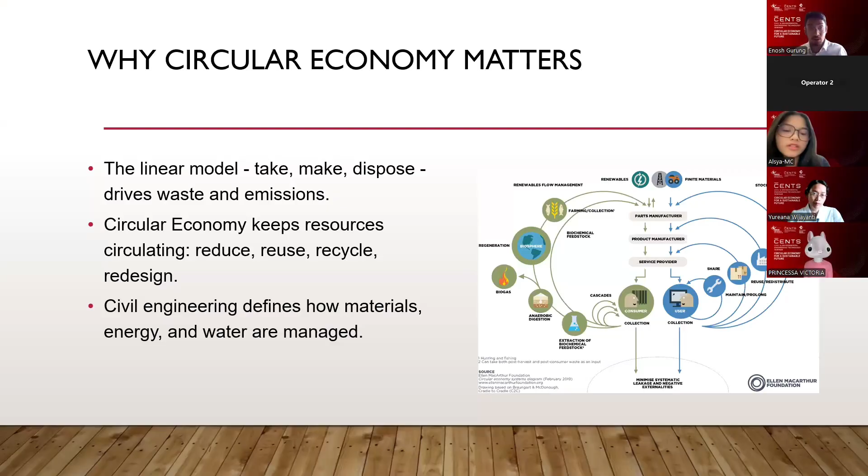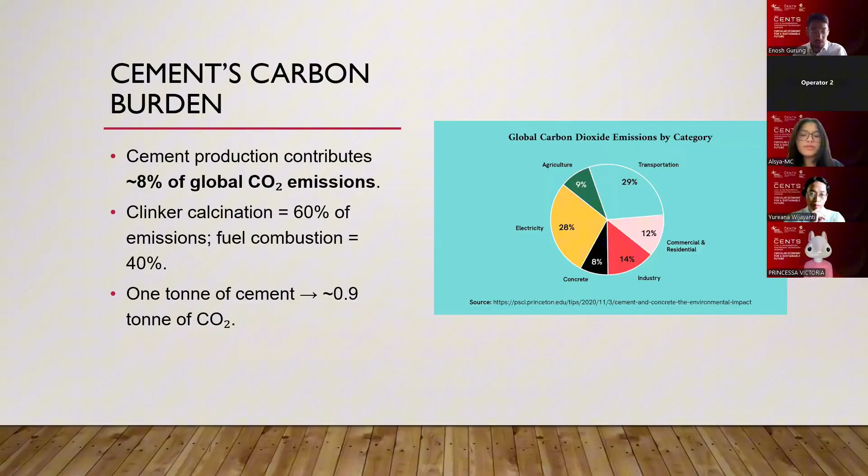So, cement carbon burden. Cement produces 8% of global CO2 emissions. Can you go to the next slide, please? So 1 ton of cement produces around 0.9 ton of carbon dioxide. One fact is Indonesia reduced its cement CO2 intensity from 725 to 614 kg of CO2 per ton from 2010 to 2020. This lowered emission per ton, but the total national emission rose because production increased. Next slide, please.

So geopolymer concrete avoids the clinker entirely. It uses fly ash, slag, and other aluminosilicate sources activated by sodium hydroxide and sodium silicate. The reaction forms a N-A-S-H gel that binds the aggregate together. Next slide, please.

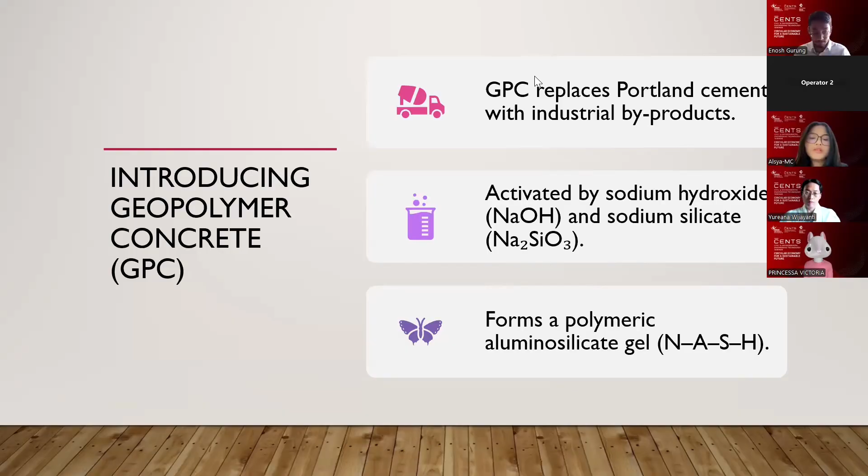Geopolymer concrete touches every circular economy loop. It reduces the carbon emission by up to 80%. It reuses fly ash, ground granulated blast furnace slag, rice husk ash, and it recycles construction and demolition waste into new concrete. We can recover from construction and demolition waste, and we can redesign durable structures with longer service life.

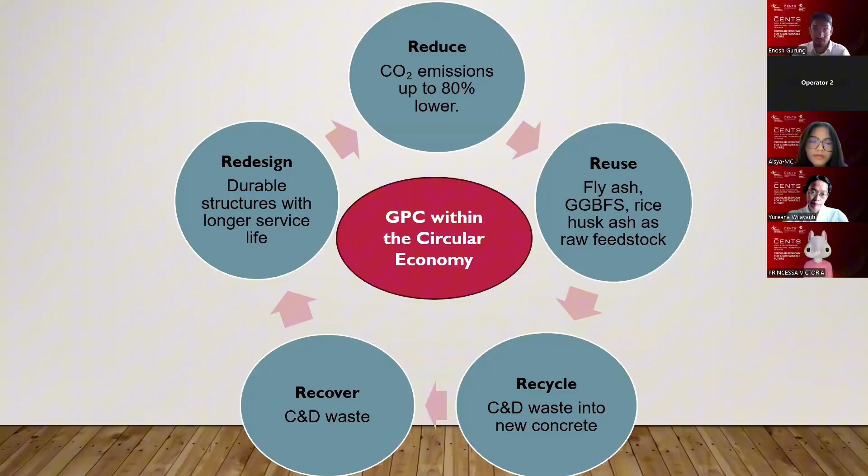Next slide. So for the raw materials of geopolymer concrete, we use fly ash that we can get from coal power plants, ground granulated blast furnace slag, which we can get from steel manufacturing plants, and rice husks from Indonesian agriculture. These are the geopolymer binders that we use. And activator chemicals are standard industrial outputs already produced locally. Next slide, please.

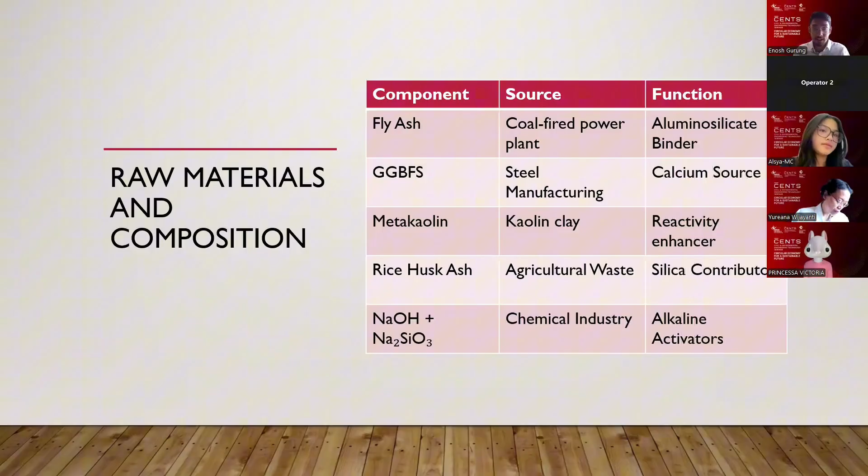So the reaction mechanism. Portland cement hardens by hydration, which relies on water reacting with clinker minerals. Geopolymer concrete hardens by polymerization, where alkaline activation dissolves aluminosilicates and reorganizes them into a dense three-dimensional network. This fundamental difference explains the superior durability and lower carbon footprint of geopolymer systems. Next slide, please.

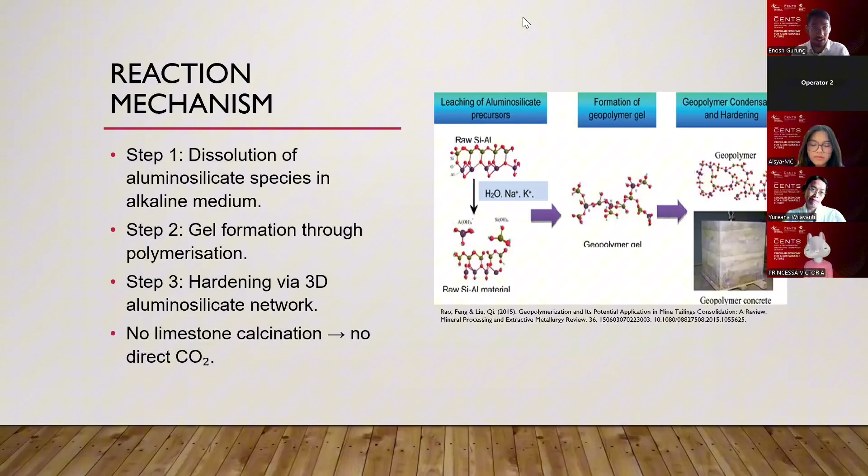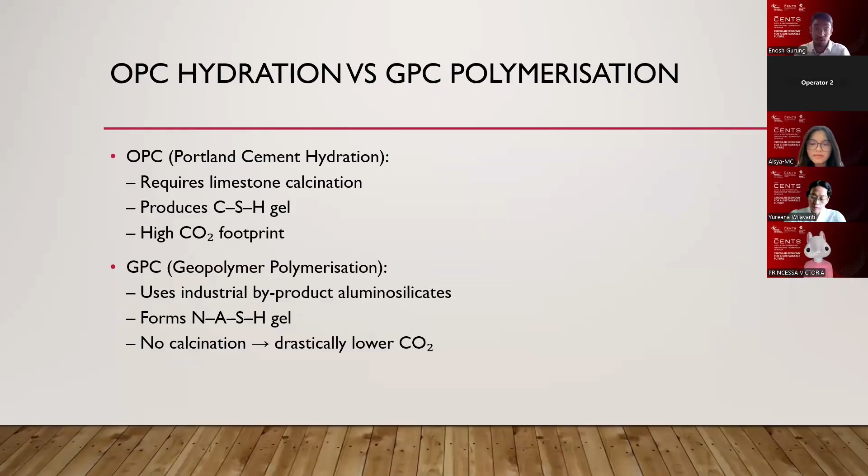So this is OPC hydration versus GPC polymerization. OPC produces a high CO2 footprint. In GPC, we don't have calcination, which drastically lowers the carbon dioxide. Next slide, please.

So geopolymer concrete shows better resistance to chloride, acid, and sulfate than OPC. Shrinkage is lower, permeability is lower, and service life is longer. An Indonesian marine-exposed beam study with high calcium fly ash found room temperature cured geopolymer concrete achieved high compressive strength and higher resistivity than seawater cured specimens, supporting field durability potential.

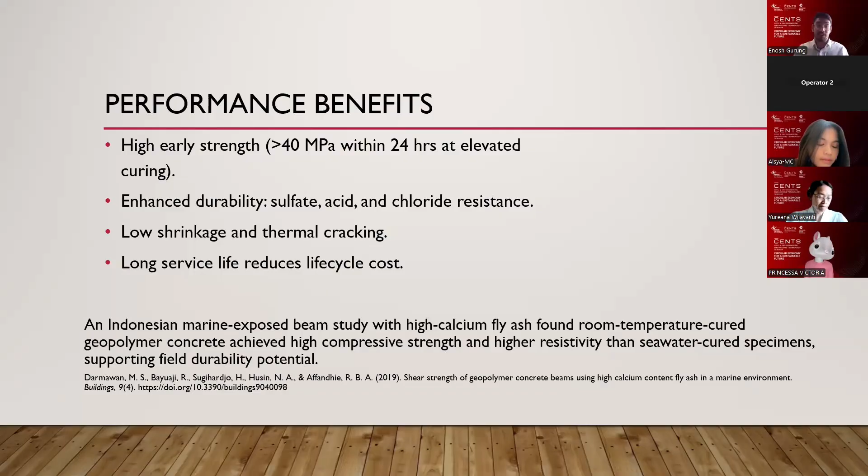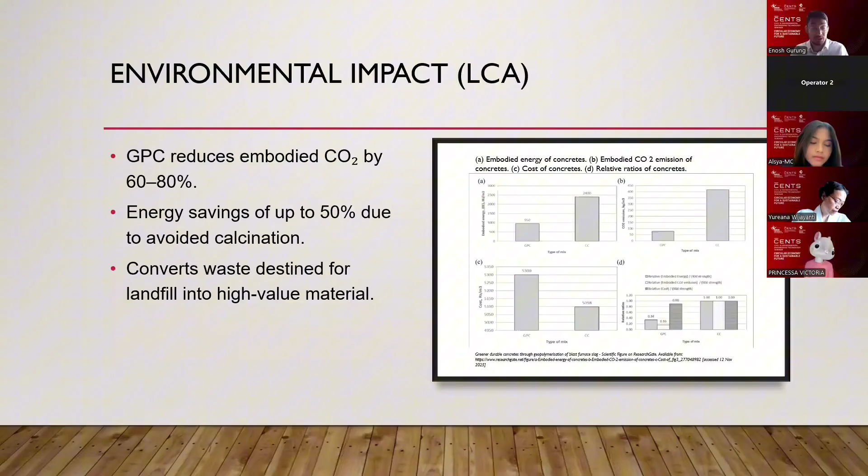Next slide, please. For environmental impact, life cycle assessment shows 60 to 80% carbon reduction with geopolymer concrete. Energy use is lower because the clinker is eliminated. In Indonesia, fly ash utilization remained below 1%, representing unused potential. Next slide, please.

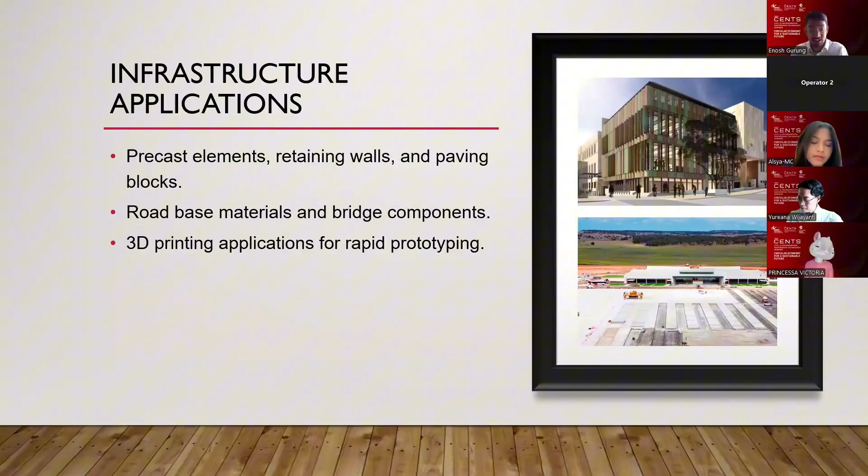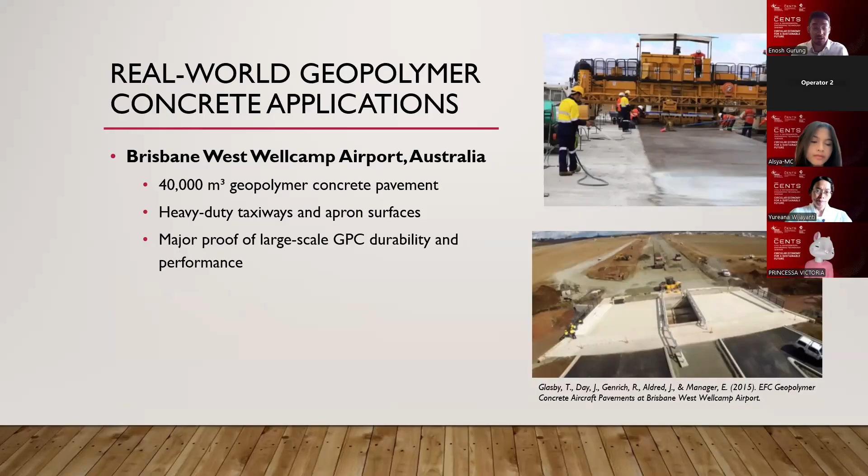So infrastructure applications. Geopolymer concrete already appears in precast panels, paving blocks, retaining walls, marine structures, and even in 3D printing. These applications align with Indonesia's infrastructure needs for flood resistance and coastal durability. Next. One real-world geopolymer concrete application can be seen at the Brisbane West Wellcamp Airport in Australia. It shows major proof of large-scale GPC durability and performance.

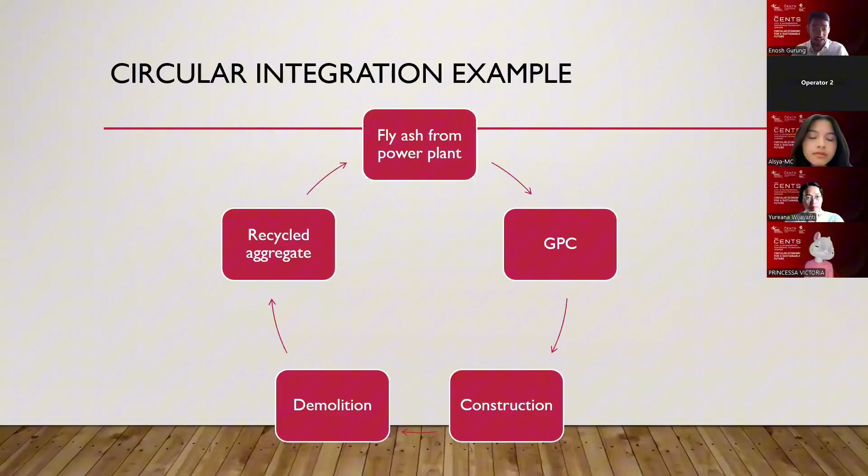Next slide, please. So as I told earlier, GPC touches every part of the sustainable economy. Industrial symbiosis converts waste into a continuous material loop. Fly ash becomes the binder, the binder becomes infrastructure, and demolition returns the material as aggregate. Nothing leaves the system. Next slide, please.

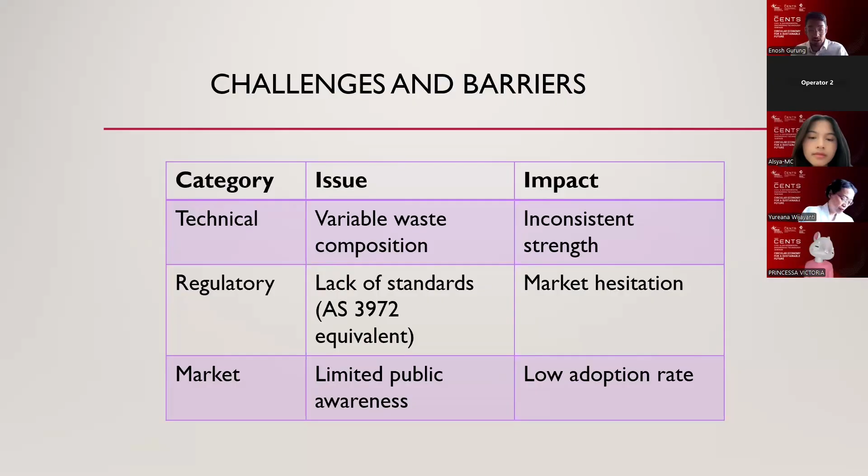So the main challenges remain in raw material variability. One study showed that fly ash found in Indonesia contains high calcium, so we have to modify it for better geopolymer concrete. Another one is that we don't have a standard for geopolymer concrete right now. Because of that, people don't use it much, and there is low public awareness of geopolymer concrete. Next slide, please.

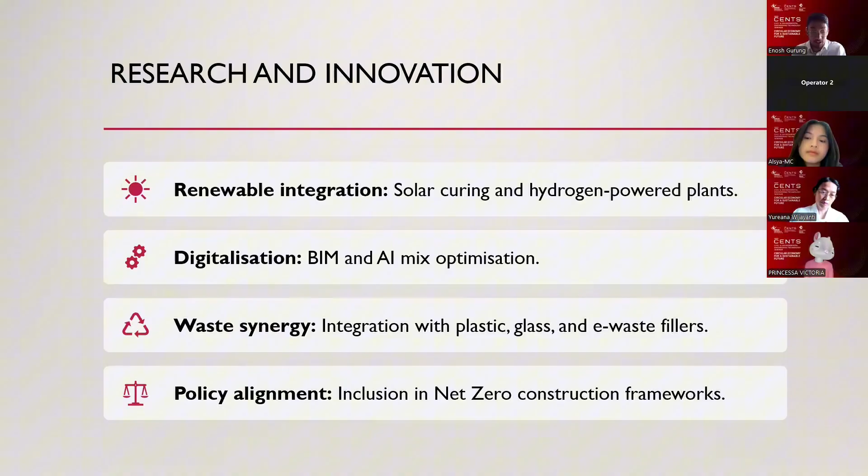For research and innovation, advancements now focus on solar curing, hydrogen power plants, BIM-LCA integration, and AI optimization. Mukherjee's work at Murdoch University on rice husk ash based sodium silicate works as a circular activator, strengthening Indonesia's local potential. And for the future, the net zero concrete pathway for 2025 to 2050 depends on eliminating the clinker. Geopolymer systems are among the core alternatives in global and ASEAN roadmaps. Indonesia's industrial ecosystem is already positioned for adoption. Slide, please.

Geopolymer concrete converts industrial waste material into infrastructure, reduces carbon footprint, extends durability, and closes the material loop. And I'll end with this line: if concrete built the modern world, geopolymer concrete can rebuild it without a carbon cost. Thank you.